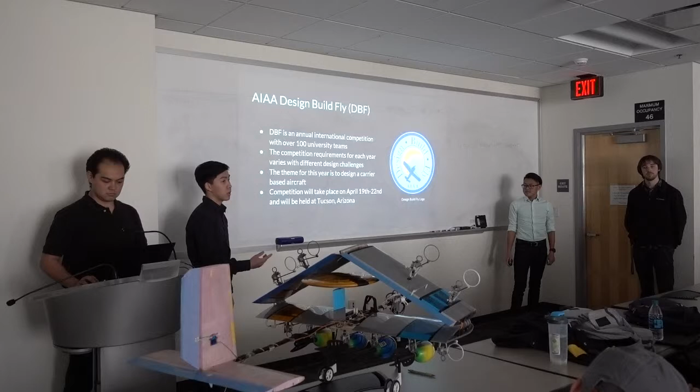Now, DBF historically has been a pretty formidable force in the competition. We've consistently placed top 10 within the past decade, with some highlights being listed over here. 2013, we got first place with this rocket-carrying short takeoff flying wing. In 2014, we had a bit more of a conventional aircraft, but it had to carry bricks.

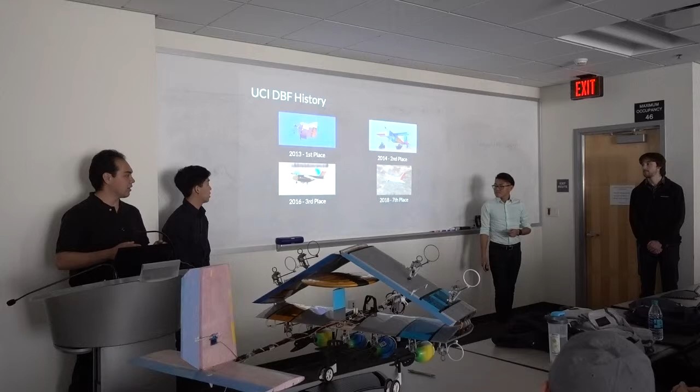2016 was a modular plane within a plane themed aircraft. And most recently, last year, where we had to play the game with a low aspect ratio passenger aircraft. So to keep with tradition, our objective this year for the 2018-19 team is to place top 3 in this year's competition in Tucson.

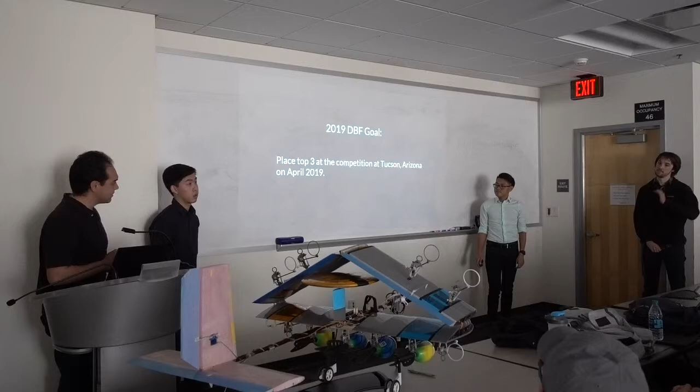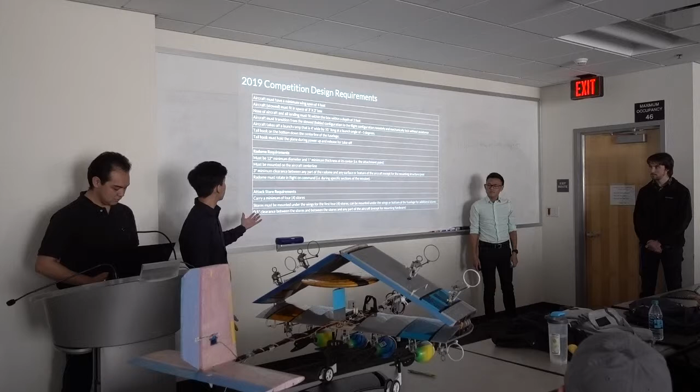So as mentioned before, the design requirements for the competition each year changes. So at the beginning of the year, the organizers release a set of rules that are purposely vague to give all the engineering teams a bit of leeway to create innovative solutions to their challenges while also meeting the design requirements. So as a team, we read through all the rules and we made note of the very important requirements and listed them above. But to summarize, next slide.

Some of the key points are that the aircraft wings for this year must be able to fold and unfold remotely. In addition to that, the aircraft must be able to carry a radome and have it rotating within flight. And lastly, the aircraft must be able to carry a minimum of 4 stores under its wings.

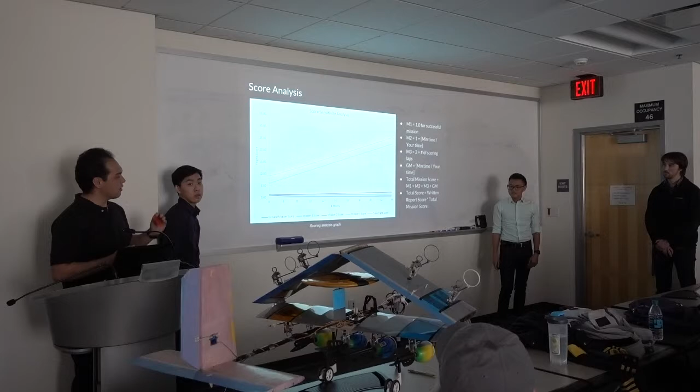As Brian mentioned, we want to try and carry more stores because it's 2 points plus however many scoring laps you can complete. Hence, from the illustration, the gray bar represents mission 3. By carrying more stores, it has the highest yield to the overall flight score. Hence, the team will be pushing towards carrying as many stores as possible to maximize its overall score.

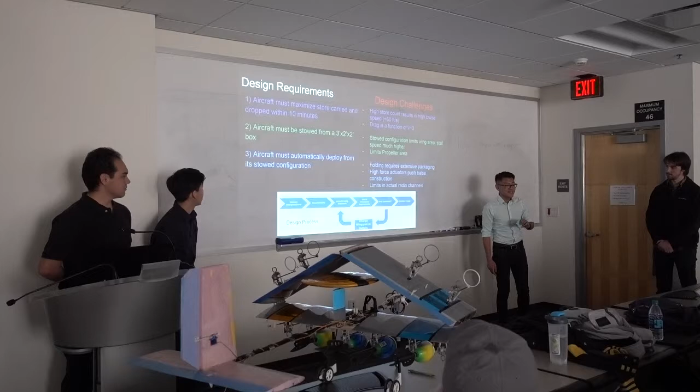Now, the whole point behind this grueling and detailed analysis of the score and this horrifying score analysis process is to translate customer requirements into design parameters. In this case, our customer is AIAA, it's Raytheon. They've released a contract, and we're trying to bid to give the best aircraft to fulfill their performances in the best way possible.

For example, the aircraft must maximize stores carried. But what does that mean? By maximizing stores, we not only have to fly at a higher speed, but we have higher takeoff weights. Speed is pretty bad. The reason why is because power is a function of velocity cubed. For a linear increase in velocity, we have a cubic increase in power required. More power means more battery packs for takeoff.

The aircraft must be stowed in a 3x2 by 2 foot box. Well, this clearly limits our wing area. A smaller wing area means higher wing loading. That means more forces and structure into our spar design. It also means our stall speed is quite high. That means takeoff speed must be higher, thrust must be higher, unless we get some magic way to increase CL max.

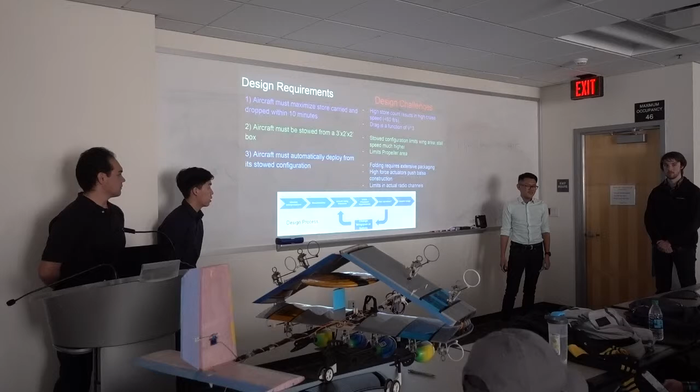And finally, the aircraft must deploy from a stowed configuration. Well, that means every single part of the aircraft has to be remotely actuated. That means in addition to your standard 6 channels to control the aircraft, we need 1 channel per store, 2 channels per folding mechanism, 2 channels per locking mechanism. Pretty soon we need over 40 channels of remotes when a typical aircraft radio is only about 8 to 14 channels.

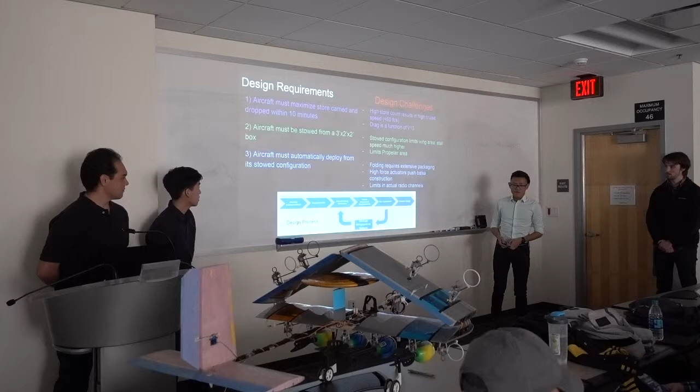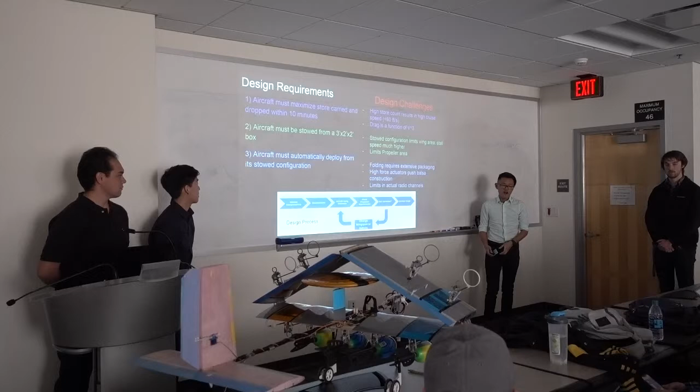It's a lot to take in, but fortunately we have some method to the madness. There is an optimization process which takes the majority of the year. The first 2 boxes are the mission interpretation and then requirement synthesis. And we've been in this loop for quite a while. You size the aircraft and then you test it, you verify it. And then you repeat this process by continuing to refine your weight and your drag estimates until you get a final optimized aircraft, hopefully at the very end. And this has been our design so far.

The power requirements, we managed to get around the wing limitations by doing 2 folds. Because it has to fit in a 3 foot box, if we make the center section 3 feet and have the wingtips fold 1.5 feet, we only require 2 folding mechanisms, which simplify design. In addition, the 1.5 foot wingtips also require less folding force. These only require the linear actuators to expend 16 ounces of force, whereas an additional length increase would increase the moment, and the force would increase exorbitantly.

And finally, we determined that a maximum of 10 stores was what we could realistically take off and carry with the flight pack. Beyond that, we were power limited or had to fly at an uncomfortable top speed. Hence, from the propulsion aspect, which consists of the main propeller, the motor, the ESC, and the battery combination, we really had to test multiple configurations with different motors.

So ultimately, we ended up settling, well, the prop's not on there right now, on a 19-inch prop paired to a 275 kV motor to be able to spin that massive prop, as well as an ESC that had a high enough voltage and current limit to make sure that the power or the thrust delivered from the motor and the propeller itself was not being restricted in any way, because we were fighting to make sure that we could even make takeoff in the past, but that seems to have been resolved.

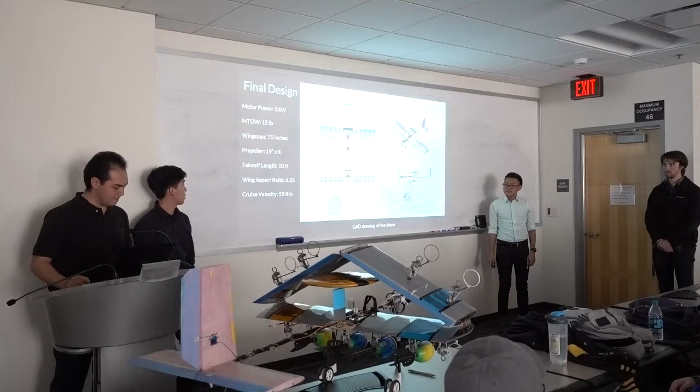Now, testing. We've designed a plane, we've sized it, and we have some initial configurations, but we have to make sure that the numbers that we've been working with the past year aren't junk. That's done by flight tests. Now, for example, the drag buildup I did initially was just purely calculations. It was all theoretical. It used geometric features of the plane like span, like wetted area of the wing, coefficient of drag estimations for the store, for the tail, interference factors, all gotten from theoretical textbooks. And I arrived at a total CD naught of around 0.0175. This basically translates to needing about 400 watts during cruise and about 1,000 watts during takeoff.

Now, the flight tests themselves proved to seem like there was a little bit more to the story than we had originally calculated. So in order to make sure that we got consistent data from the aircraft itself after testing its individual components, we employed the use of a Pixhawk 4 unit, which is essentially like an autopilot system. It's not allowed during the competition, but we'll remove it before then. But the main point is the Pixhawk allows us to control things like the airspeed, the altitude, the flight control systems, to maintain a steady level flight condition.

We need this in order to maintain consistent power data, as you can kind of see in the plot above on the top, that as the Pixhawk controls the aircraft and flies the laps it's programmed to do, it's trying to maintain a constant speed of about 55 feet per second. The voltage does drop, that's the red line, a little bit, but that's just because it's trying to maintain the speed it was programmed to do.

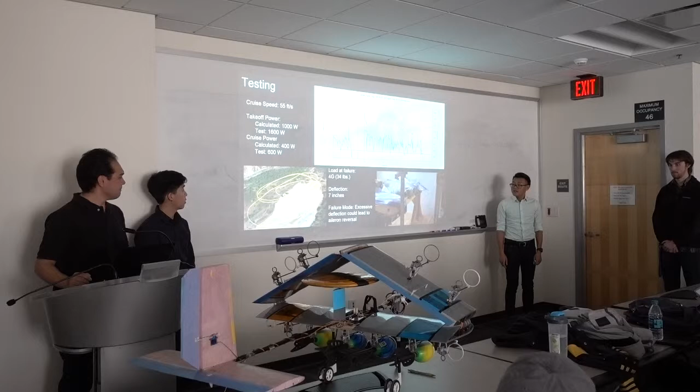Pixhawk helped us refine the efficiency and those constant values from the original guess, or estimations, I should say, in our drag development, that all contributed to making sure that we can build or carry more stores ultimately in the end. And that about wraps up propulsion testing.

We also had to validate the structure of our aircraft was sound to withstand certain loads. Now, wings are loaded elliptically, or ideally they do, but we determined that our aspect ratio was large enough that we could approximate an elliptical lift distribution. So we took a prototype wing and made a wing jig test stand. It clamped it at the end to simulate how it would be anchored at the root of the wing.

Next, we weighted sandbags at specific increments in order to match an elliptical lift distribution, which we got by using AVL, which is a vortex lattice program that basically plots CL as a function of span. We use this information to get loads for those sandbags and increase them in terms of Gs, because that's typically how the competition determines load failure, and increased it till it failed.

In this case, we determined that it failed because of excessive deflection. If your aircraft deflects and twists too much during flight, there is a strong possibility that your control surfaces actually reverse their functions, in what's called aileron reversal. For our case, the wing deflected 7 inches before we deemed it too much. But it took 4 Gs, which is around 34 pounds.

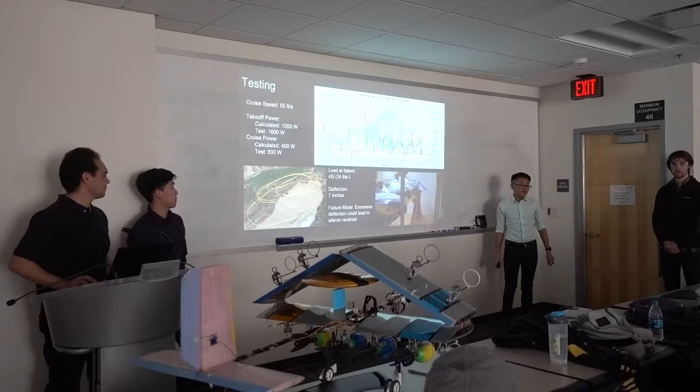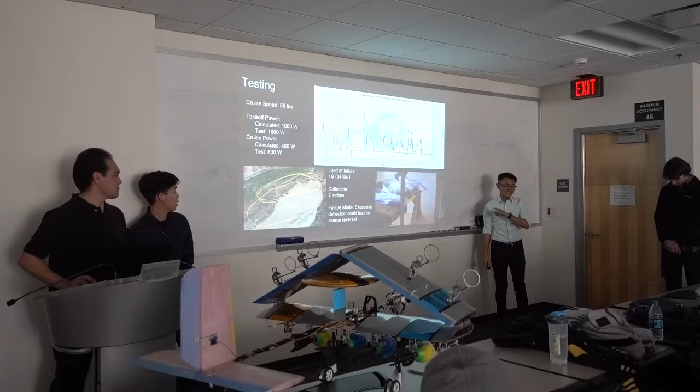This is a lot more than we expect. It's just about 2 Gs, I believe, for the competition requirements for the wing to test. So it is a bit overbuilt. But the important part is that the wing locking mechanism, the wing joint, did not deflect. We do have a flight test plan, but unfortunately we are running a little bit low on time, so we'll be skipping ahead to the manufacturing budget and moving forward from there if there's time available.

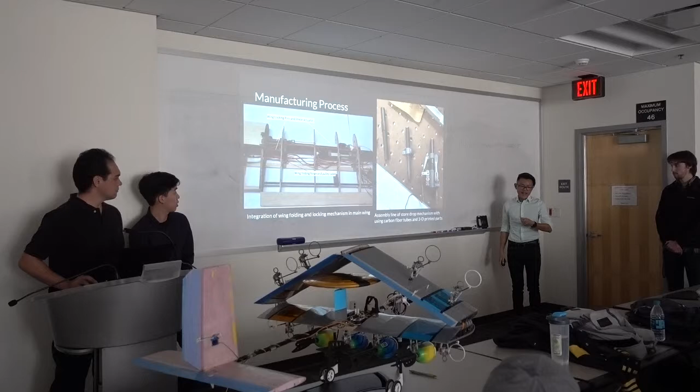Now, manufacturing, typically we use a lot of balsa construction. In this case, a lot of the prototyping, because there was a lot of fine mechanics involved, was made using 3D printed parts. 3D printing allows rapid prototype production and very accurate dimensional reproduction. We use a lot of composite tubes too. Most of our composites this year were pre-made, but historically we have done things like molding. Wings were typically molded in the past using fiberglass and epoxy.

But of course, it's one thing to design and build the aircraft. We also need a team to manage it. Right, so the team involves a hierarchy structure consisting of the chief engineer at the top, along with the project manager and all the faculty advisors, followed by all the sub-teams who essentially take the guidelines from the chief engineer, again referred to from the rules, that passes down to the project manager to be communicated down to the team to try and meet those requirements.

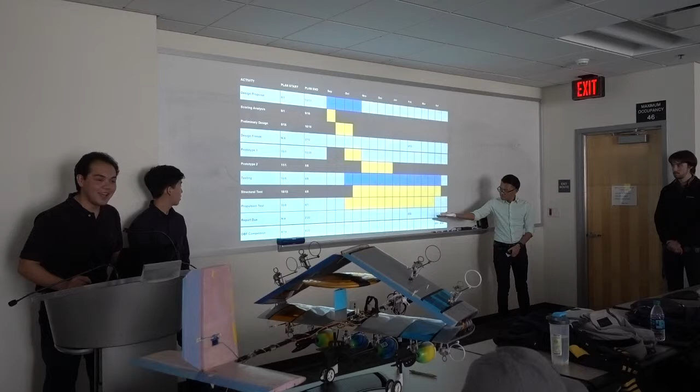With that being said, here's the Gantt chart that the team has followed and where we see ourselves in the coming spring quarter, most notably with the design proposal due last October, the design report, which is actually due tomorrow, and our competition mid-April. Last but not least, we have our budget breakdown that we've spent so far in the competition and where we see ourselves spending a little bit more in the future.

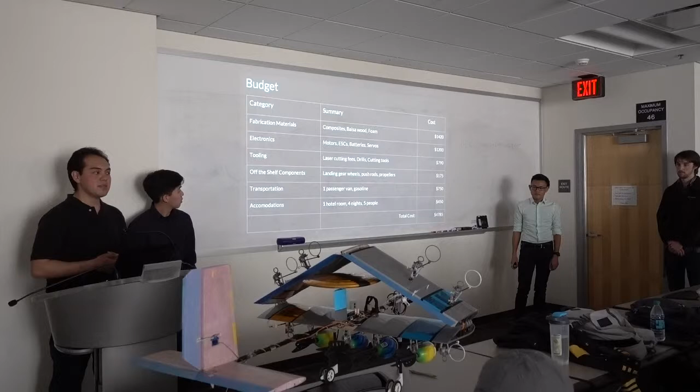So key takeaways would be, again, because the scale of the aircraft as it is requires a lot of components, a lot of time and money has been spent in terms of buying fabrication materials and electronics in order to power the systems. And most notably, after all the manufacturing and testing is done, the competition will require a little bit of money for transportation and accommodations. But with that, do you have any questions?